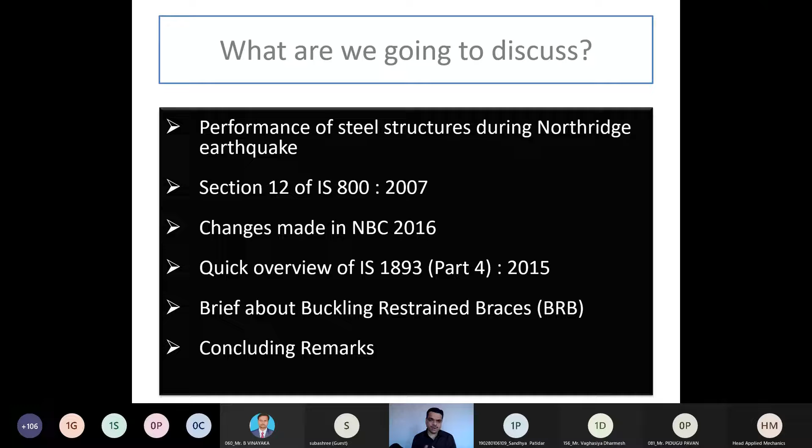Okay, let us begin our talk with the Northridge earthquake and steel structures. So this is the common statement: whenever we talk about steel structures, they are considered relatively safe for earthquake resistant design, because it's a more ductile material compared to RCC, reinforced cement concrete. That's why steel structures may be a good option as compared to RCC.

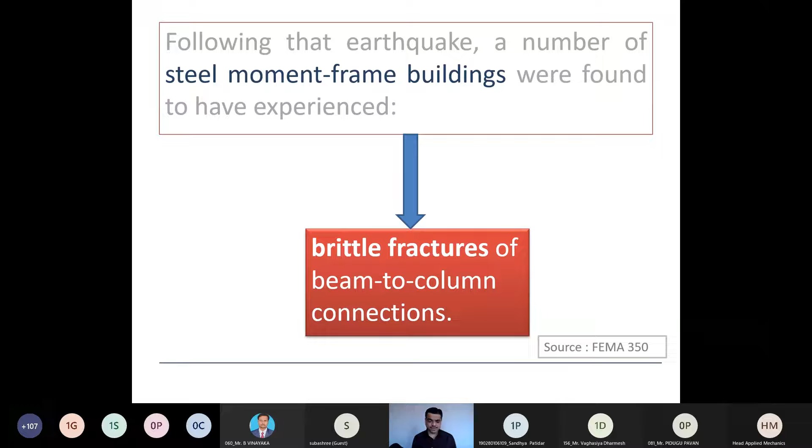But what happened in the Northridge earthquake, which occurred around 1994, challenged this thought process that steel structures are not vulnerable during extreme seismic events. Following that earthquake, a number of steel moment frame buildings were found to have experienced brittle fractures of beam to column connections. Just focus on this area: the failure mode was brittle fracture of the beam to column connections, and it was not just in one or two buildings—many buildings had this kind of failure.

If we quickly take the statistics of the damaged buildings by height and age, we can say it was ranging from 1 story to 26 stories. And age spanning, the buildings were as old as 30 years to structures being erected at the time of the earthquake itself. So it's quite a diversified range of structures which were damaged.

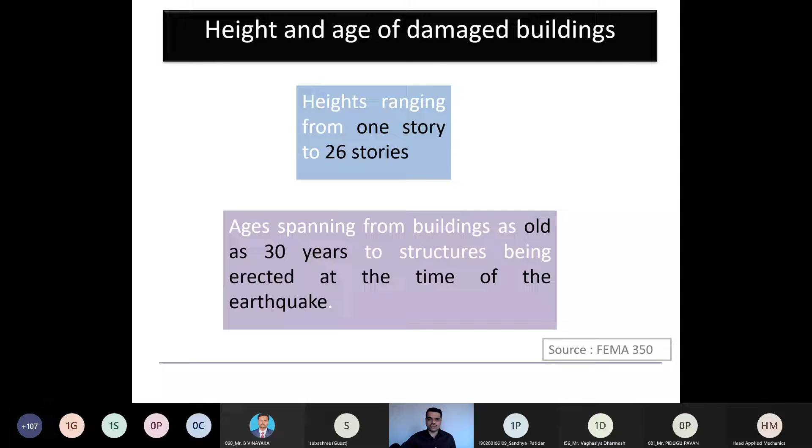Again, it's important that no steel building suffered a catastrophic failure that took lives in that earthquake, but some were so badly damaged they had to be demolished. If a building is completely damaged and required to be demolished, that's a huge financial loss. And if we talk about industrial structures in oil and gas, thermal power plants, etc., it's a huge loss in terms of revenue and property asset of the country.

So what happened in all the damaged buildings? There was one peculiar failure—weld connections cracked in the beams and columns of at least 90 such buildings.

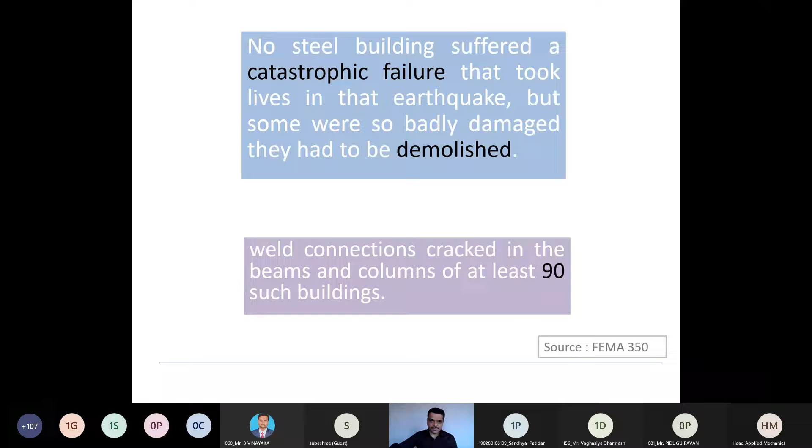Whenever we design for earthquake resistant design, the expected damage is always a kind of moderate yielding, maybe localized buckling of the steel elements. But the actual damage was brittle fracture at the beam column junction. And obviously, whenever the beam column junction fails, the structure doesn't have capacity to take more lateral load, maybe due to functional requirement, or it may not be fit for taking the next cycle of the earthquake. So these connections are required to be repaired. But this damage—the brittle fracture at the beam column junctions—was not at all expected.

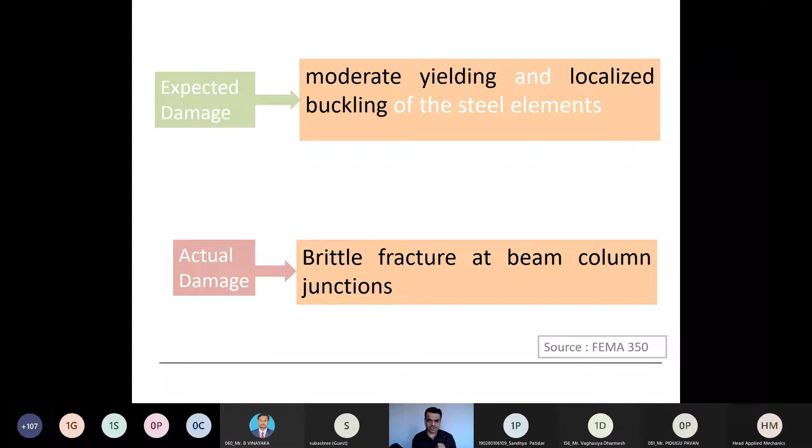So what is our overall design philosophy when designing for earthquake resistance? The structure should be able to withstand higher amounts of displacement, because we reduce the earthquake force by the response reduction factor and perform first order elastic analysis. But during an actual extreme seismic event, the force would be substantially higher, and the displacement the structure has to withstand will be much higher than what we get from first order elastic analysis. That's why the structure has to be ductile. If this joint is not able to withstand the higher displacement, the whole concept will not meet its requirement. So if inadequately constructed, these welded joints in moment frames can become weak links—this is the premature failure, because it's not expected.

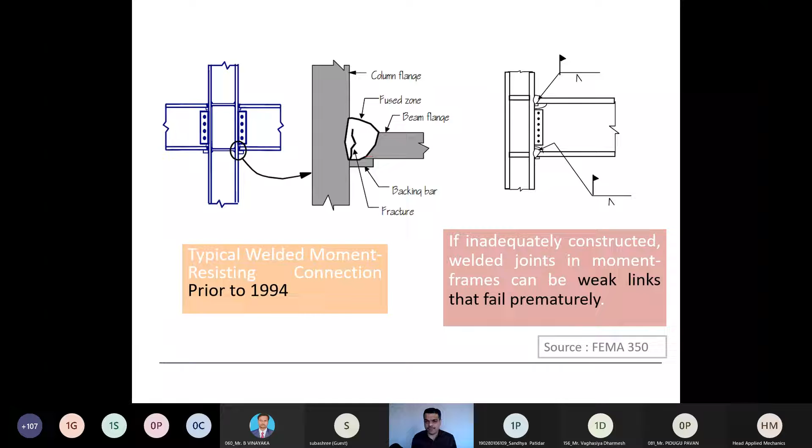Now let's say there is connection damage in a structure. In order to determine whether a building has sustained connection damage, it is necessary to remove all architectural finishes, fireproofing, etc. that has been applied, and then perform detailed inspections.

Let's talk about an industrial structure where an extreme seismic event has passed. Inspecting each and every connection is a very tedious exercise, and we do not have any set protocols for how to identify, just by visual inspection, whether a connection is adequate or not, unless it has some major distress which is visually appealing or visible.

Even if no damage is found, this is a costly process, and repairing a damaged connection is even more costly. And that's why after the event of the 1994 Northridge earthquake, the entire typical welded connection was revised significantly.

That was an immediate improvement. Thereafter, around 120 to 130 steel connections were tested full scale, and based on that, pre-qualified connections were developed. So if I get a certain beam size, the column size is fixed, or similarly if I have a certain column size, the beam size is fixed. Considering all permutations and combinations, 120 to 130 full scale connections were detailed out, and a detailed pre-qualified connections guideline was developed.

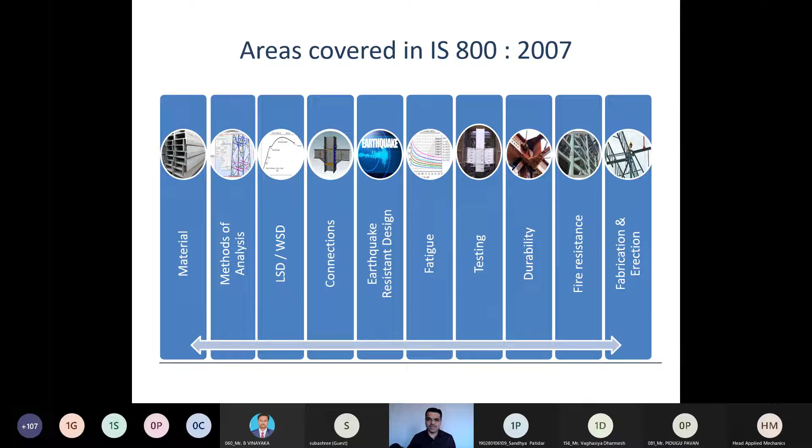So earthquake resistant design is just a small part of it, which is section number 12. Section 12 talks about earthquake resistant design.

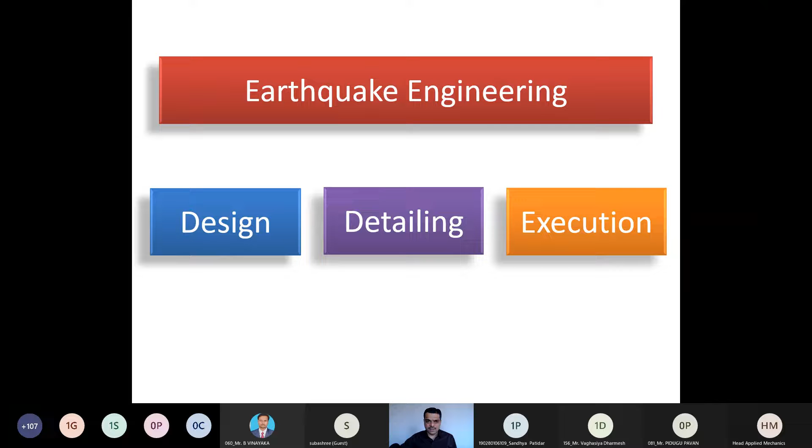Whenever we talk about earthquake engineering, these are the three main pillars of earthquake resistant design: design, detailing, and execution. All three pillars have to be given proper justice simultaneously. For example, if I have done very good design and detailing, but execution is not done as per the detailing, then it doesn't serve any purpose. Similarly, if design and execution is done but detailing is not up to the mark, like connection detail, then the entire aim of earthquake resistant design will not be met. So these are the three main verticals we should keep in mind when talking about earthquake resistant design.

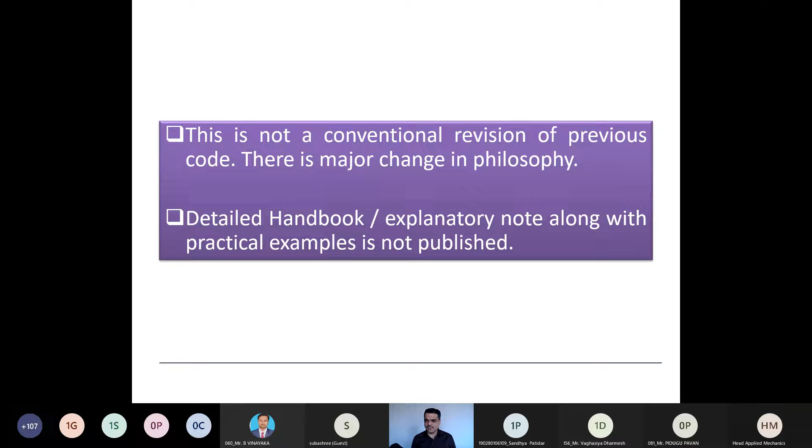As I told you, this is not a conventional revision of the previous code. There is a major change in philosophy in IS 800 2007, so there are many practical difficulties. Right now there is one online course going on related to IS 800 2007 wherein we are discussing and debating each and every clause. One of the major problems is that the detailed handbook explanatory note along with practical examples is still not published. That's why there are many questions in the minds of structural engineers.

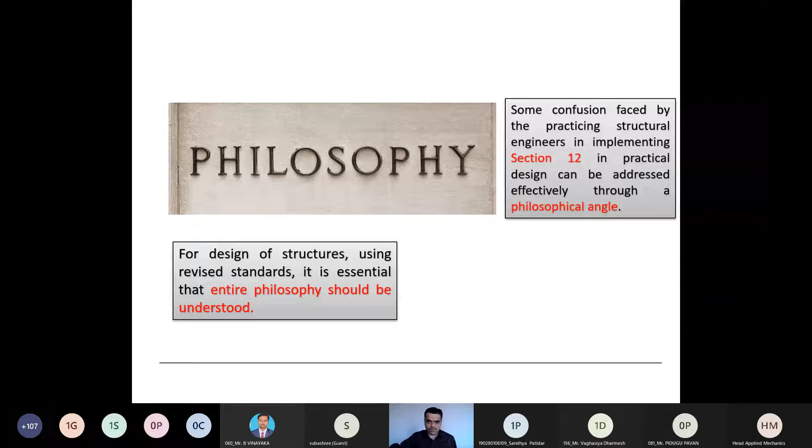But what I always say is that these confusions faced by engineers, for section 12 or other parts of the code, if we try to understand the entire philosophy of the code, then it is easy to understand and decode the individual clause and how we can apply it in software. So we will touch upon a couple of clauses to understand in such detail.

But of course we can have a more elaborated discussion, maybe if required in future. Right now, I'll touch upon a few important clauses of section 12 and share my quick perspective related to different clauses, and we'll talk about a couple of clauses in more detail.

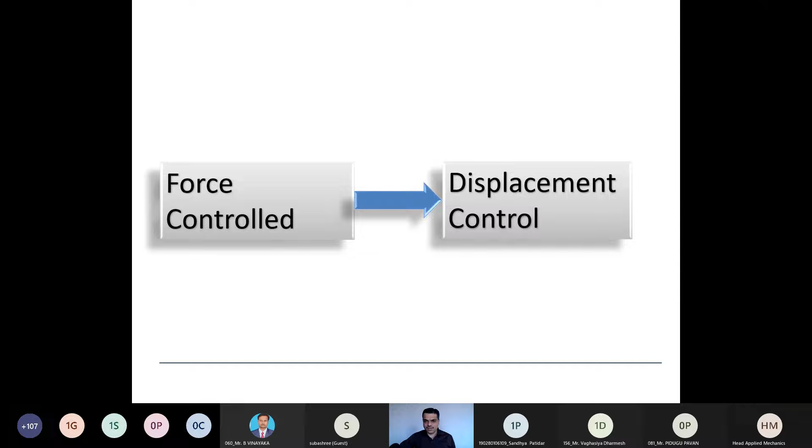So now we can say that we are migrating from force controlled design to displacement controlled design in our overall design philosophy of earthquake resistant design. Generally we are performing first order elastic design, and these are the two major drawbacks: as we all know, reserve strength cannot be quantified, and the collapse mechanism is not known whenever we perform only first order elastic analysis.

Now when you talk about section 12, it says that the steel frames shall be so designed and detailed as to give them adequate strength, stability, and ductility to resist severe earthquakes in all zones without collapse. So this is the overall aim of earthquake resistant design as per section 12.

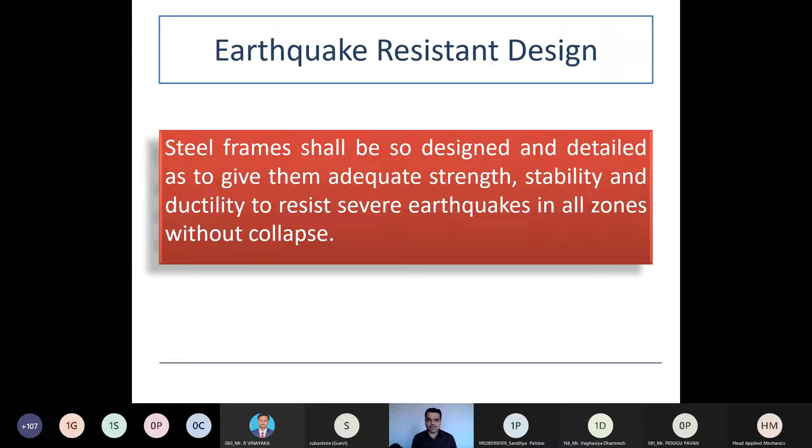So I always used to say that when we talk about section 12, it is nothing but ductile detailing for steel structures. Like for RCC, we have IS 13920, which is a separate code detailing out ductile detailing for reinforced concrete structures. But for steel structures, I'm used to saying that section 12 is ductile detailing for steel structures.

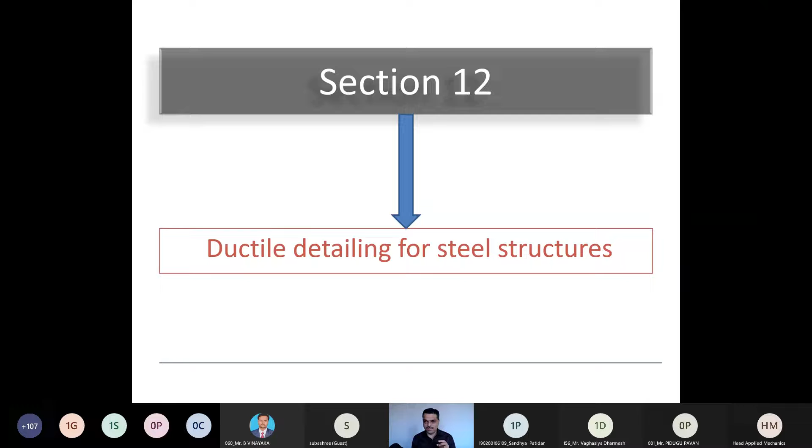So let's have a quick overview of section 12, and we will try to discuss a couple of clauses in detail.

So section 12 is for earthquake resistant design, and it is applicable to frames which resist earthquake load. Now in steel structures, not all frames are designed for resisting lateral loads, or rather for resisting earthquake loads in today's context. So this section is applicable only to frames which are going to resist, or which are designed to resist, the earthquake load.

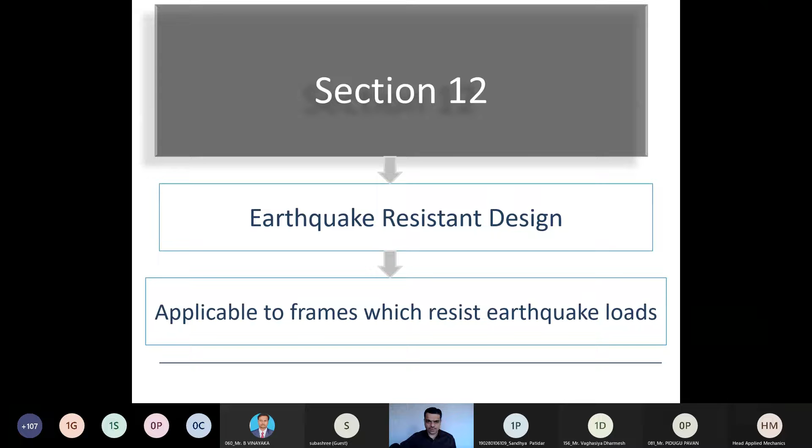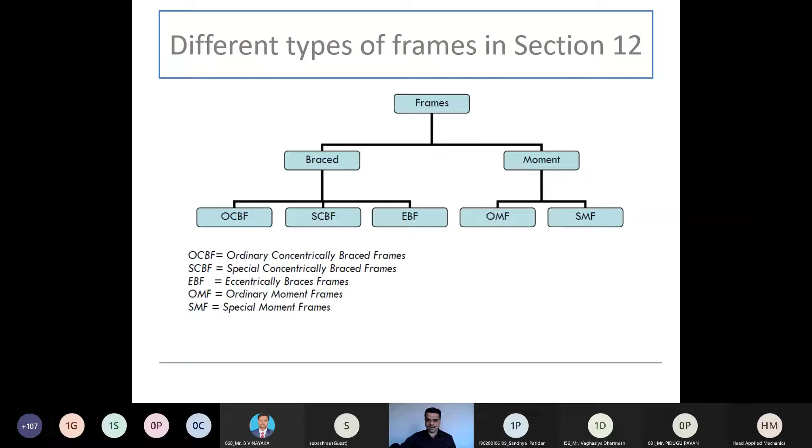So before that, just let me touch this one point.

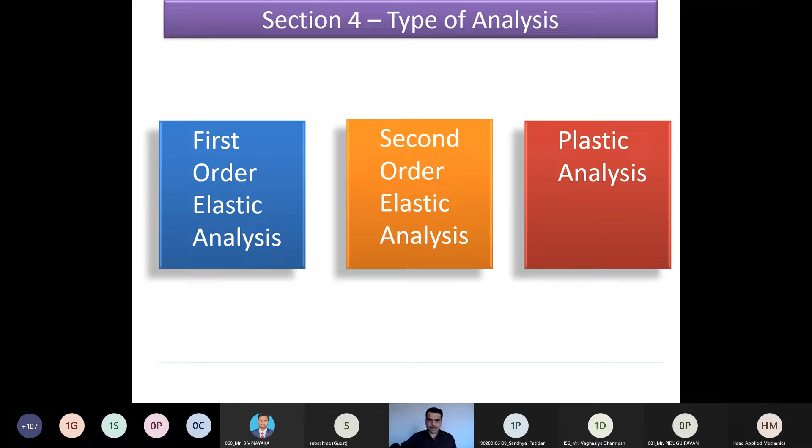Section 4 of IS 800-2007 talks about different types of analysis, wherein plastic analysis is also detailed out. Generally plastic analysis is allowed in IS 800 or BS 5950 code. It is allowing the use of plastic design where loading is predominantly static and fatigue is not a design criteria. So whenever we talk about earthquake resistant design, we can go for this plastic analysis. This plastic analysis is nothing but a kind of performance based design. It is already included in IS 800-2007 section 4, and this is a major area which should be further taken up in the industry for cost optimization as well as for ensuring better performance of steel structures during extreme seismic events.

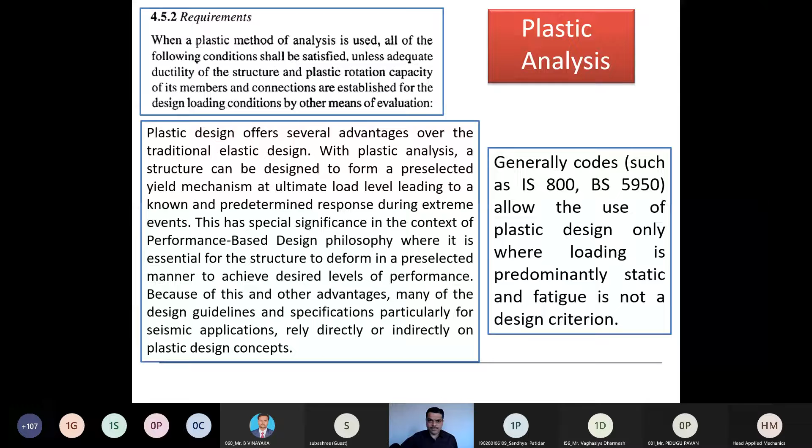So what will happen if you start considering plastic analysis? This is a simple diagram which I have put up here. As we all know, whenever we consider a simply supported beam and apply a concentrated load, up to the elastic limit we will have the moment My. And if we consider it as a fully plastified cross section, the plastic moment will be 15% higher as compared to the elastic limit.

So this is only one beam which we are talking about. But when we talk about a real structure, there will be more redundancy, which results in higher strength using plastic analysis. Depending on the degree of indeterminacy, a number of hinges are required to be produced before the yield mechanism can form, which results in a significant reserve strength beyond the elastic limit.

So at present it's not followed in the industry, but it is already written into the code. I am suggesting that we should prepare certain guidelines for practicing engineers so that it can be followed into the industry with more confidence.

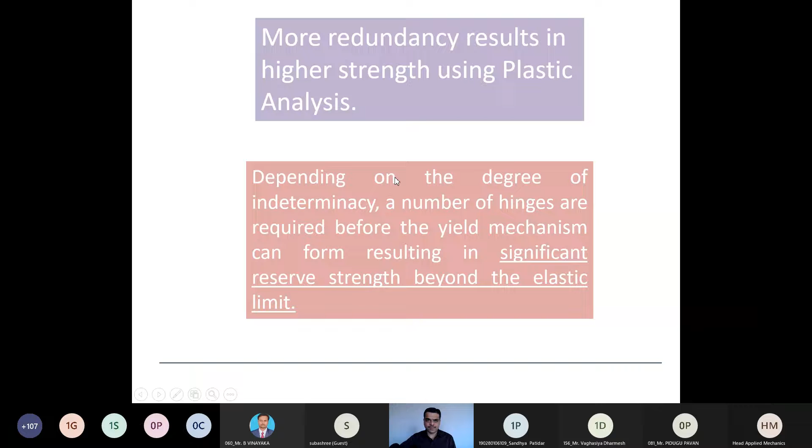Now, when we talk about section 12, as I told you this is a kind of ductile detailing, more thrust is given to connection design in section 12, and earthquake forces are generally increased by 20% for connection design. Detailing of connections is also suggested for different types of frames.

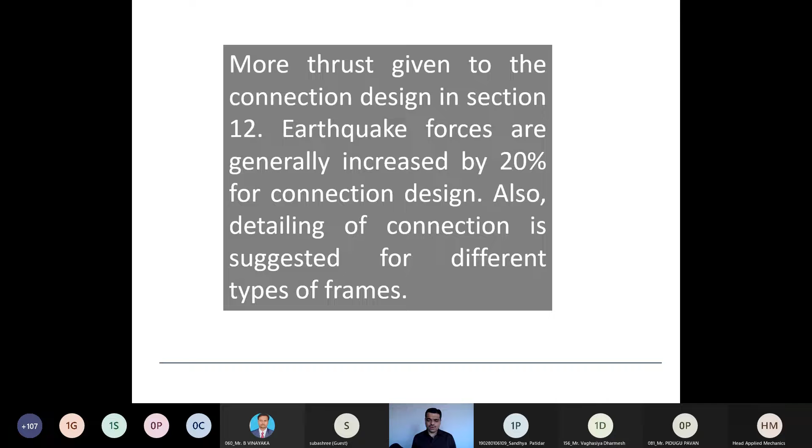Quickly, if we talk about connection details as per section 12, it talks about complete penetration butt welds, and high strength friction grip bolts or turned and fitted bolts to be used. The bolts are to be fully tensioned. Regarding weld, we have already discussed that all welds should be full penetration butt weld except splice. So no other type of weld is allowed.

So whenever we come to section 12 for earthquake resistant design, this is the major area for connection design we should take care of, because it changes the type of bolt as well as the type of weld.

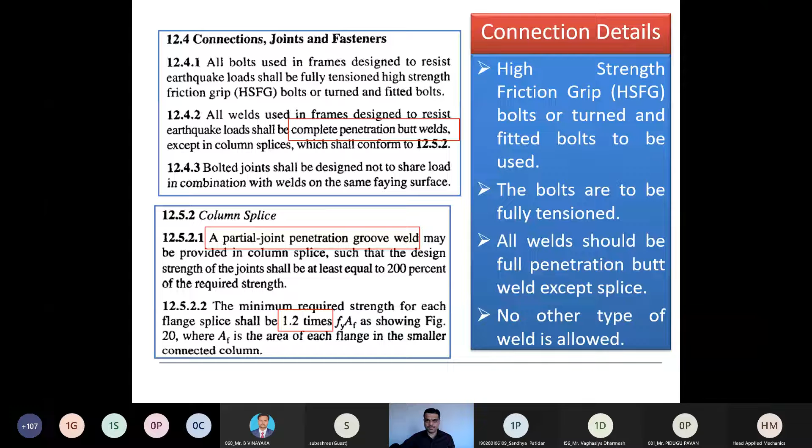Now this is a very interesting clause, para number 12.7. It is for ordinary concentrically braced frame. Let me tell you honestly, when I read this clause for the first time, I took at least a couple of years to understand it, because every time I'm designing a new structure, I come to this clause, I start to rethink on it, but it was not getting very clear in my thought process. But after designing a few structures after 2008, slowly and gradually I started thinking about this clause, and I'll share my own perspective, what I understand. Let me tell you honestly, this clause is simply, or let's say silently, ignored in practice as of today. Now let's try to read out what it says first.

What it says is that the ordinary concentrically braced frame, OCBF, should be shown to withstand inelastic deformation corresponding to a joint rotation of at least 0.02 radians without degradation in strength and stiffness below the full yield value. Ordinary concentrically braced frames meeting the requirements of this section shall be deemed to satisfy the required inelastic deformation.

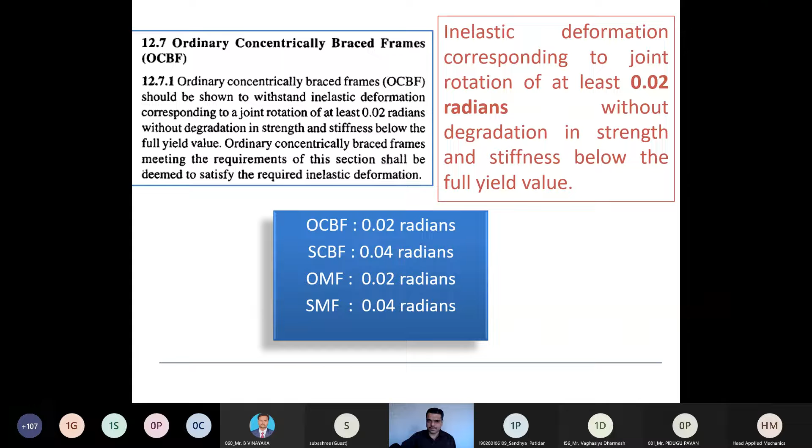So another requirement for ordinary concentrically braced frame: it is said very clearly that K bracings are not permitted, and slender bracings are not permitted. Now this para number 12.7.2 is also creating a lot of debate and discussion, because it restricts the bracing member to a slenderness ratio of 120 only. What's the reason for this 120?

One reason is that whenever we talk about earthquake force, it is actually reversing, let's say, in the plus x and minus x direction. So if we have provided bracing in the structure, that bracing member will have to take compression in a certain cycle, and then it has to take tension in the reversal cycle.

So when the compression force is applied on the bracing, and this force has exceeded—because as we just discussed, we are actually reducing the earthquake forces using the response reduction factor—now during an extreme seismic event, if our bracing buckles during the compression cycle, it won't be able to take the next reversal cycle coming through tension. Because of that, there is a higher requirement for the bracing with respect to slenderness.

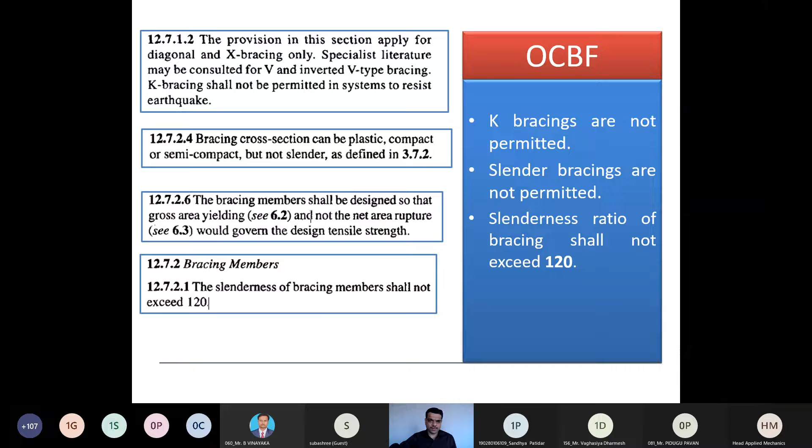Now, in OCBF, again, there are a few other requirements: the utilization ratio in compression should not exceed 0.8, and the criteria for design of tension member is also defined here. Connection design criteria are mentioned for the bracing as well.

Now let's go to SCBF, which is a specially concentrically braced frame. As we discussed, for the specially concentrically braced frame, the first thing is the joint rotation of 0.04 radians we need to demonstrate, and thereafter these other requirements are given. So for SCBF, the first requirement is that all sections shall be plastic, all braced cross sections.

And the slenderness of the bracing shall not exceed 160. This only applies to the bracing which are not taking part in the earthquake resistant design, or let's say these are just taking axial tension.

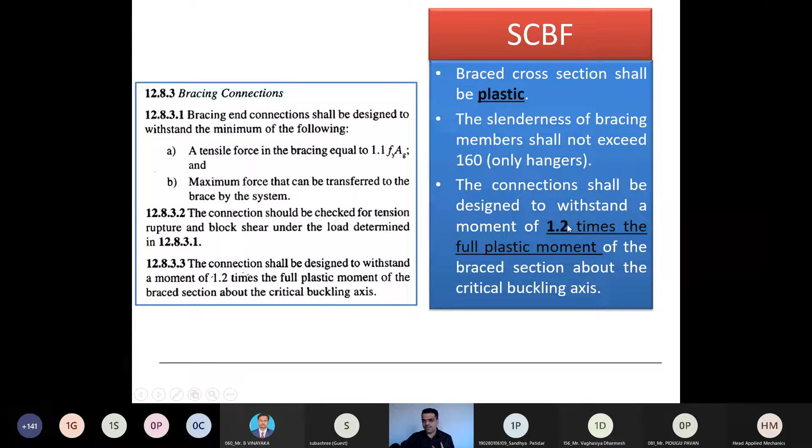And the connection shall be designed to withstand a moment of 1.2 times the full plastic moment. So the connection shall be designed considering this 1.2 times the full plastic moment, and accordingly that connection needs to be detailed out.

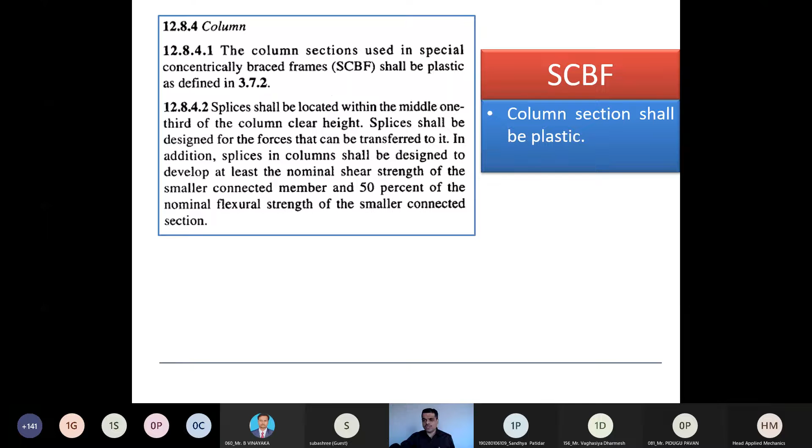And for SCBF, obviously all column sections also shall be plastic.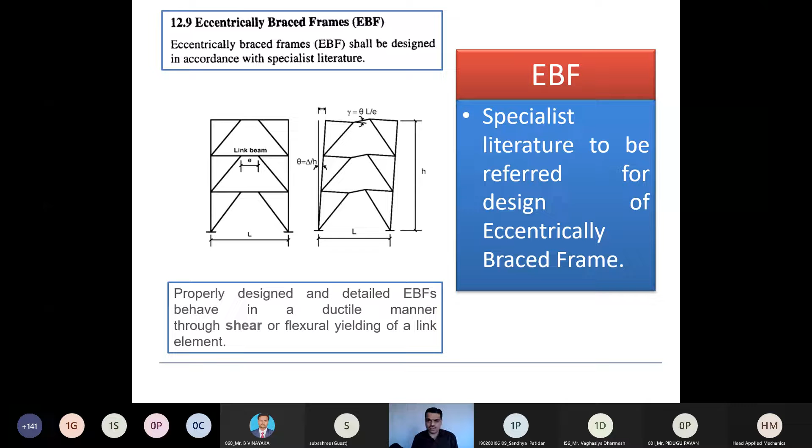But that thought process is not fully correct, because as you all know, whenever we talk about EBF, we actually need to create a kind of link beam between two connected bracings, and that link beam will absorb the entire seismic energy during the extreme seismic event, while the rest of the structural elements remain elastic. So this is the overall philosophy or concept of the EBF, which is not at all detailed out in our code. Instead, it is said that specialist literature should be referred.

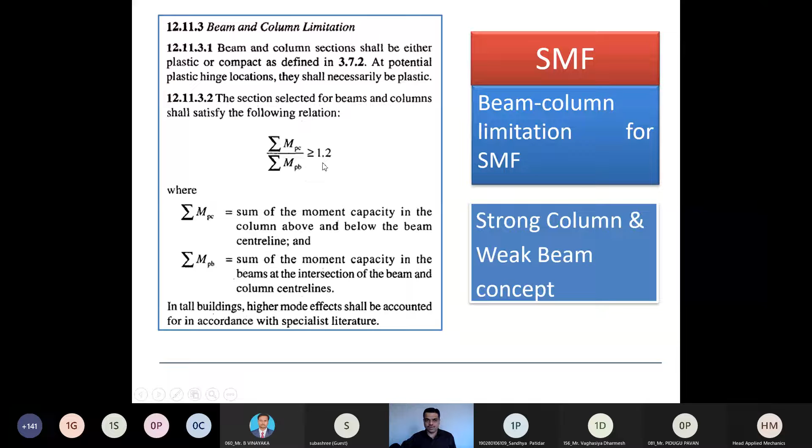Now, when IS 13920 was released, it introduced the clause for strong column and weak beam, and right now that ratio is 1.4. But when we talk about steel structures, the strong column weak beam concept was introduced long ago, in 2008, and that ratio is 1.2, which is detailed out in paragraph number 12.11.3.2.

And one more area related to the design of column bases, which is creating a practical problem, because it says that the fixed column bases and their anchor bolts should be designed to withstand a moment of 1.2 times the full plastic moment capacity of the column section. And the anchor bolts shall be designed to withstand the combined action of shear and tension, as well as prying action, if any.

Now, what happens if we really put the actual numbers, considering the full plastic capacity of the column section, is that the size of the base plate and the anchor bolt become extremely high or impractical to accommodate into that region. That's the common feedback which we are receiving regularly from practicing engineers, and we also experience the same thing while following this clause.

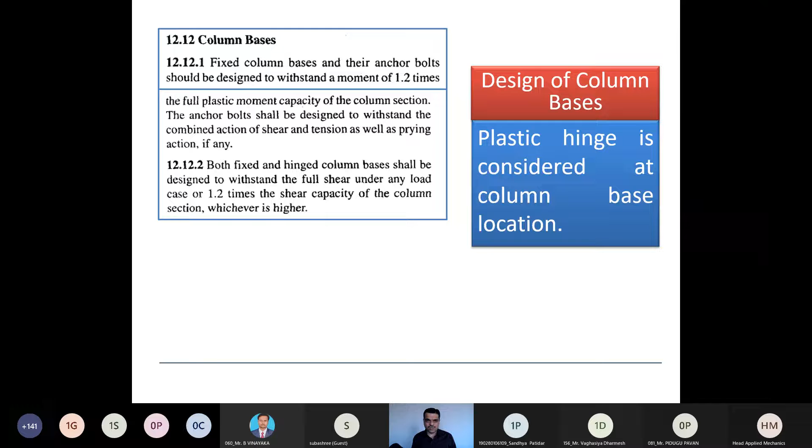But the overall intent of this clause is that the base plate connection is also one of the locations where a plastic hinge could occur, and that's why that junction also needs to be detailed out with this requirement. But I think some more clarification is required in this clause.

Okay, so this was a quick discussion related to section 12. Of course, we have not discussed each and every clause, but I just took up a few important clauses for discussion. Now here I have just made a quick comparison with the older Indian Standard code, which is the 1984 code.

And right now, let us talk about the design methodology. As we all know, 800-2007 is a limit state design method, and the old IS code is a working stress design method. So when we compare the member design, and if we consider IS code 1984 as a benchmark, then the member design may be economical as per 800-2007, or maybe similar in some cases. And it may be stringent in certain cases, because there are certain different limit states which have been introduced in 800-2007.

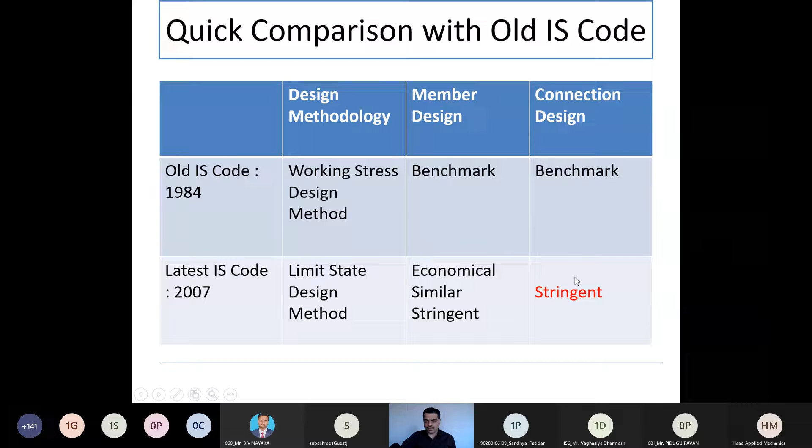But most importantly, when we talk about connection design, and if we make the benchmark the connection detailing as per 800-1984, then the connection design is substantially more stringent as per 800-2007. And that's what I'm suggesting to different groups of practicing engineers whenever I get an opportunity, because there are many offices in which the connection design is still not updated with respect to the latest code - it is still prevailing with respect to the earlier code. So I just wanted to make this point here, that the connection design is stringent as compared to the earlier code.

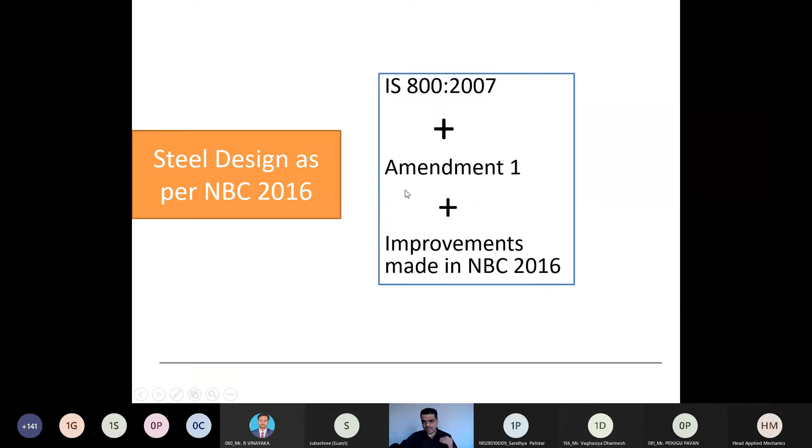Let's quickly touch upon changes in NBC 2016 with respect to design of steel structures. As we all know, IS 800/2007 was released in 2008, and thereafter only one amendment was released, which is amendment number 1, released in 2012. This is the final document we have as of today, but there is a major update to this. When NBC was revised in 2016, majority of the Indian standard codes were reproduced. So when IS 800/2007 was reproduced in NBC 2016, it included IS 800/2007 plus amendment number 1 plus improvements made in NBC 2016. So NBC 2016 actually becomes the latest document for design of steel structures as of today, having IS 800/2007 plus amendment number 1 included, plus certain improvements made in NBC 2016.

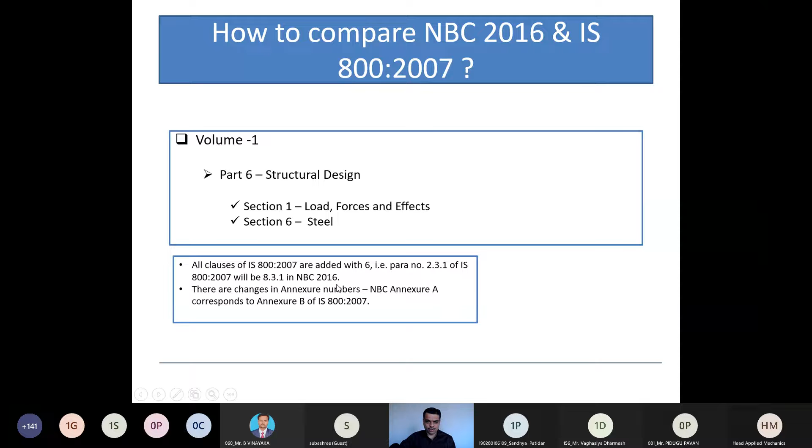Here I'll give you a quick methodology on how to read and compare NBC 2016 and IS 800/2007. In NBC there is a volume 1, then part 6 which is structural design, and then section number 6 which is for steel design. So for example, if you have paragraph number 2.3.1 of IS 800/2007, the same will be mentioned as paragraph number 8.3.1 in NBC 2016.

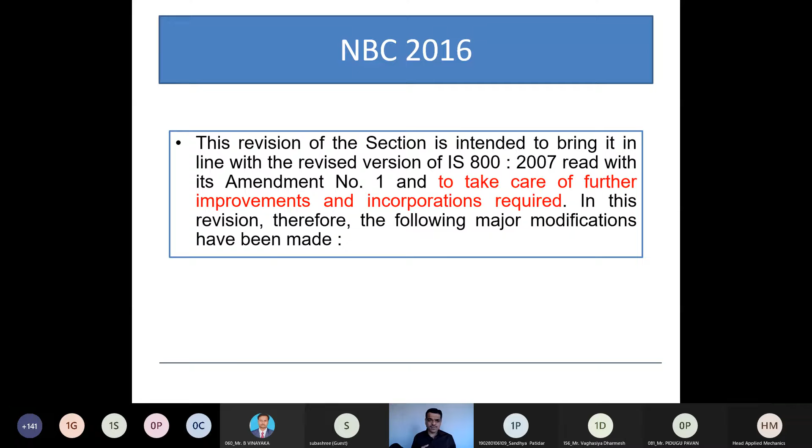I have taken this extract directly from the foreword of NBC 2016 for your quick reference: this revision of the section is intended to bring it in line with the revised version of IS 800/2007 read with its amendment number 1, and to take care of further improvements and incorporations required. In this revision, therefore, the following major modifications have been made. Here I've taken a couple of extracts from the foreword related to today's talk.

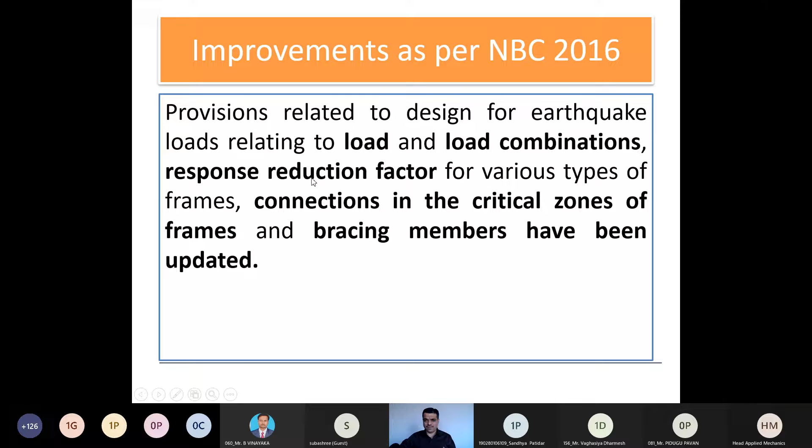It says the provisions related to design for earthquake loads relating to load and load combinations, response reduction factor for various types of frames, connections in the critical zones of the frames, and bracing members have been updated. So whenever you're referring to section 12, please refer to the latest document in NBC 2016. Whatever we discussed related to section 12 was extracted from IS 800/2007. I'd advise, if you are referring to 800/2007, please keep NBC 2016 side by side, as this is the latest document, and you can see these differences have been made. Right now, due to time constraint, I'm not going into all the changes made, but you can go through NBC 2016, and if you have any further doubt, you can always contact me.

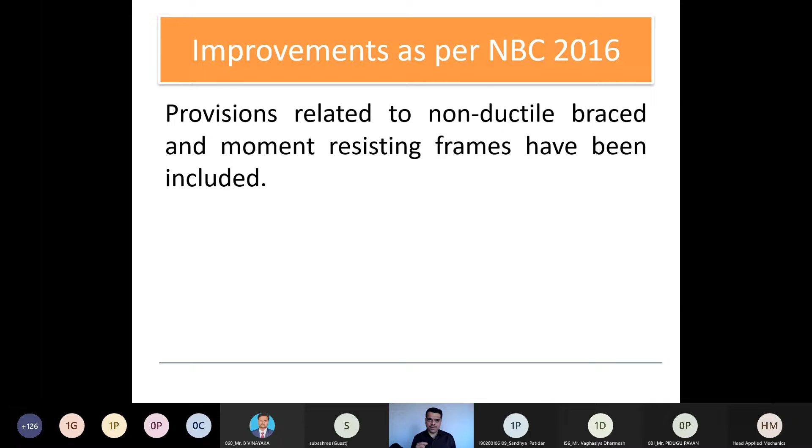Also, the provisions related to non-ductile braced and moment resisting frames have been included. This statement is taken from the foreword. And one more thing - provisions on ductile designing with respect to the column base connections have been updated. It is written that the column base connection design has been updated, but when I compared text to text of both documents, I couldn't find any difference. But you can go through it, and if you find any significant difference, you can highlight it and share it with me. So this was a quick discussion related to section 12 and the changes done in NBC.

Now when we talk about design of steel structures, IS 1893 Part 4 2015 is one of the most important codes, because as I told you, majority of the steel structures constructed in India are for industrial purposes, and that's where IS 1893 Part 4 2015 comes into the picture. Keep a note that for 1893 Part 4 2015, also 2 amendments have been issued. Those amendments I have not included in this presentation, so while referring to this presentation, please keep in mind there are additional 2 amendments which you should keep for reference while reading this document.

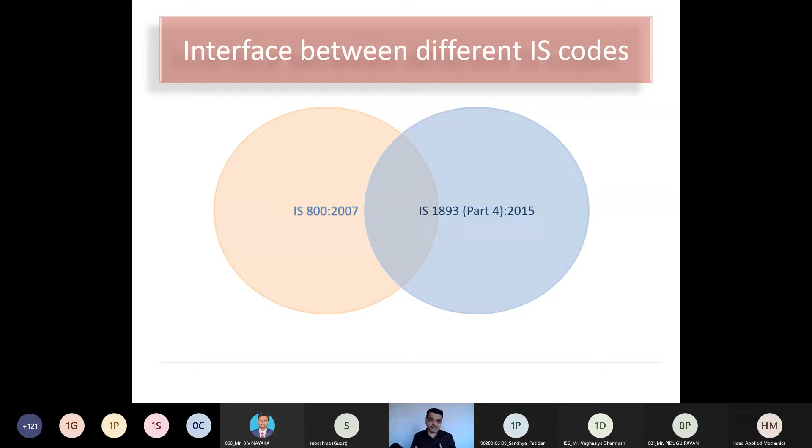So within that time, whenever the next revision comes, we get substantially higher amount of information, because whatever the global industry or the global accumulated intelligence has attained in the last 10 to 15 years is being incorporated into the code wherever possible. That's why we get a very steep jump whenever a revision comes, and that's why this interface is also very much important.

So for IS 1893 Part 4 2015, I have taken a few slides to quickly understand how it is different and what different methodology we need to adopt when designing industrial steel structures as per this code. First it talks about vertical acceleration: earthquake generated vertical inertia forces are to be considered in design unless checked and proven to be not significant. So to check and prove that the vertical inertia force is not significant, we will have to apply the vertical seismic load.

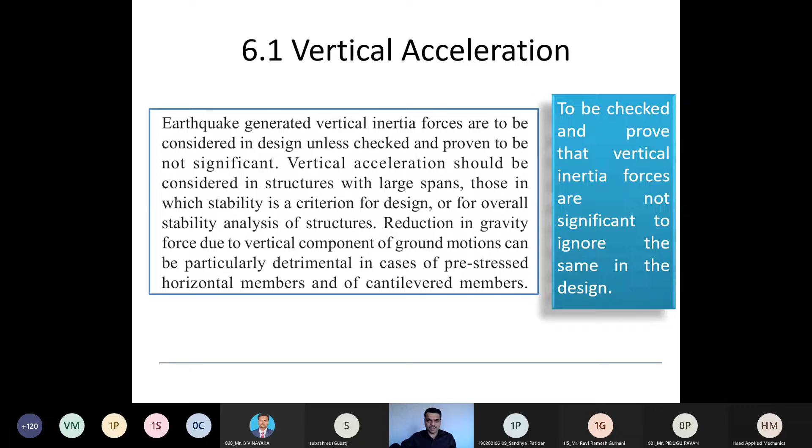It also says that in steel structures, members and their connections should be so proportioned that high ductility is obtained as specified in IS 800, avoiding premature failure due to elastic or inelastic buckling of any type. So when it says high ductility, the go-to statement is Section 12.

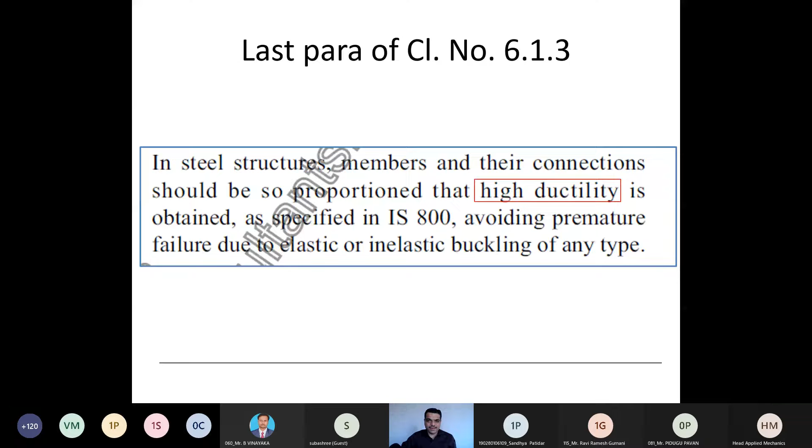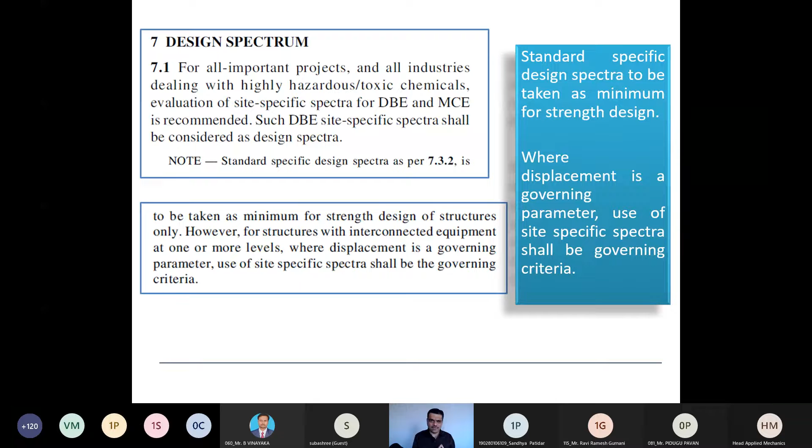Now it's talking about design spectrum. For the majority of industrial structures, we are developing the design spectrum also, which is a kind of site-specific spectra. The design is then performed as per the site-specific spectra as well as per the design spectra given in the Indian Standard Code, and accordingly the design is performed.

Now when we talk about load combinations, IS 1893 Part 4 2015 gives load combinations for the plastic design. We touched upon the plastic analysis area when we discussed IS 800 2007 Section 4. Para 8.3.1 of Part 4 gives the load combinations for plastic design, and that factor is 1.7, as you can see.

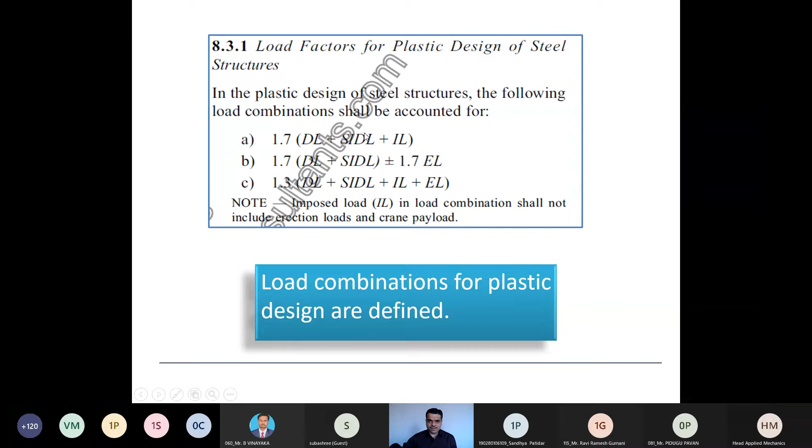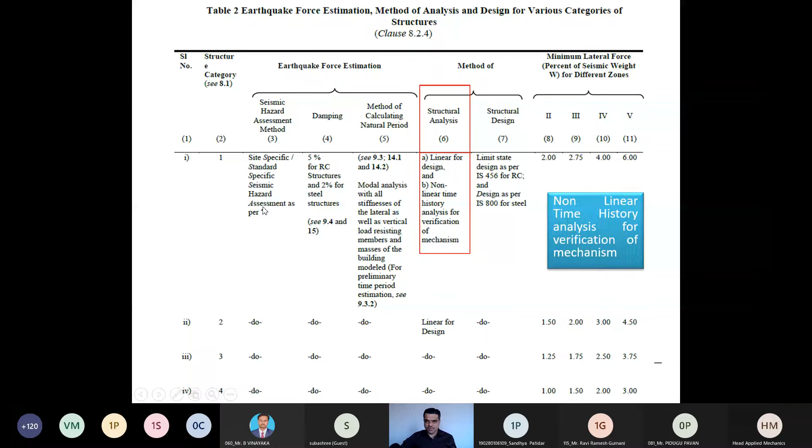It also says that whenever the plan-wise distribution of mass and stiffness is not symmetrical, we need to combine the earthquake forces in all three directions. Generally for industrial steel structures, the distribution of mass and stiffness will not be symmetrical, so consideration of earthquake force in all three directions simultaneously needs to be done.

Now one more clause creating problems in the industry is for soil structure interaction. It says soil structure interaction may not be considered in seismic analysis for a structure supported on rock or hard soil-like material, when N is greater than 50 and shear velocity is around 760 meters per second. So if my structure is sitting on hard strata, soil structure interaction may not be required. But for all other cases, whenever it is sitting on soft or medium soil, soil structure interaction is required - so for the majority of cases, it is required.

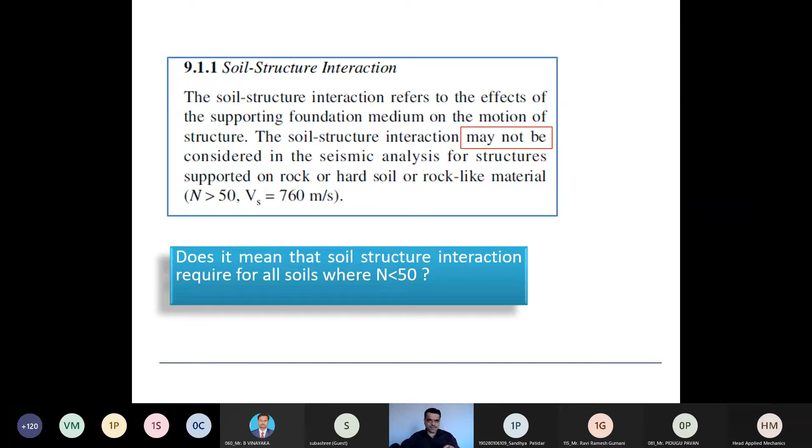Now, how to do it? There is always a debate happening between the design consultant, the proof checking consultant, and the owner's consultant. This area we can discuss in detail if you are interested, but right now I'm just highlighting a few of the important points as per this code.

Now it's talking about interaction effects between the structure and equipment - that is, the interaction effect between the structural primary system and the equipment secondary system. A very detailed process is given in the code for how this interaction effect can be considered. This is also one of the areas where difficulties are being faced, because there are no worked out examples.

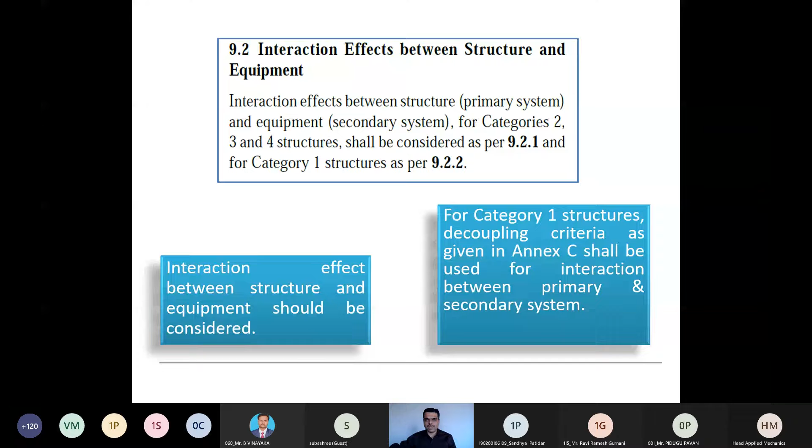One more area related to time period estimation. IS 1893 Part 4 says that the formula given in IS 1893 Part 1 for estimation of time period for buildings, which is para 7.6, is not applicable for industrial structures because they are highly irregular and there may not be an empirical formula like the one derived for building kind of structures in Part 1.

So the time period from the computer model will be considered, and that's why I've put this note in red that the time period calculation should be accurate. There are several instances in real projects where, because of a higher time period, the earthquake force is substantially lower. So based on our database and engineering judgment, we provide an internal scaling factor to enhance the earthquake force.

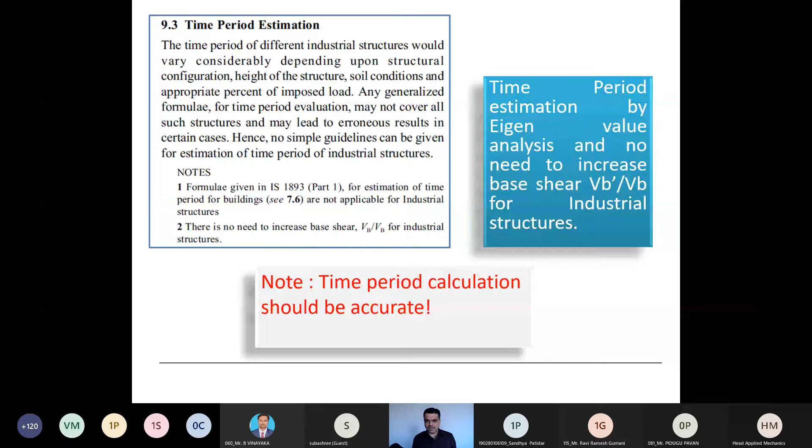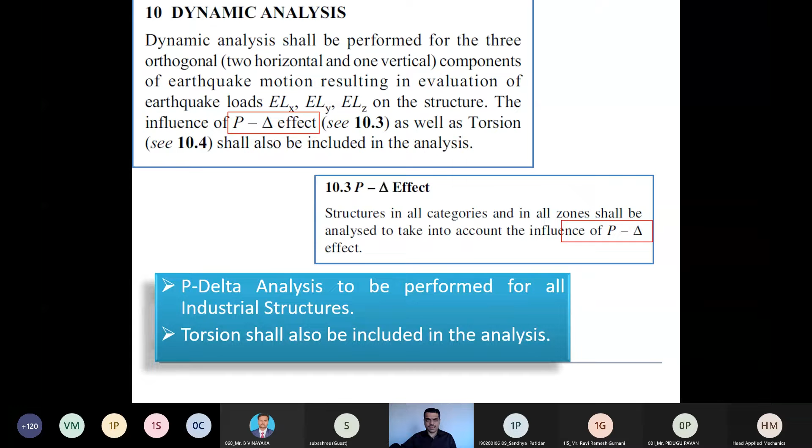Now the code says that the P-delta effect is mandatory for all structures, and torsion also needs to be included in the analysis. So second order elastic analysis is now compulsory for all structures.

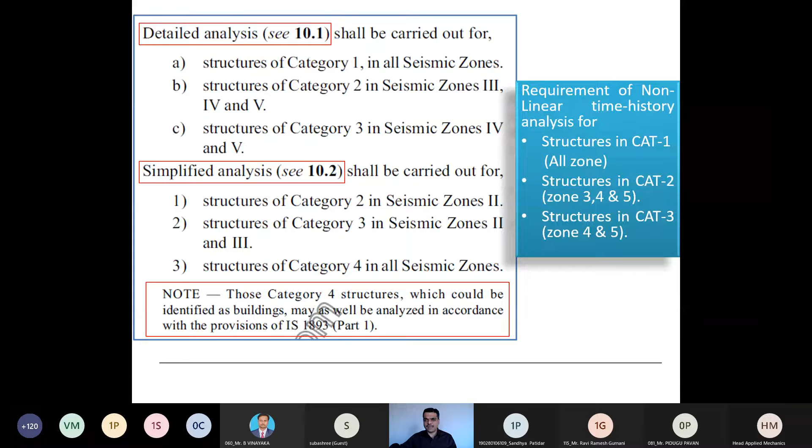This para talks about the requirement of nonlinear time history analysis for different categories of structures. Para 10.1.1 says that nonlinear time history analysis of structures subjected to seismic loads shall be performed for study of safety against collapse, and this is the only small para given. So this is also an area which needs to be detailed out to avoid ambiguity in practice.

Based on this, the collapse mechanism needs to be found out, and there are certain exercises going on in different organizations I'm connected with, regarding what is the actual impact on tonnage if we consider this clause versus if we ignore this clause.

One more important point - in Part 1 it is said that damping is 5% irrespective of any material of construction, whereas in this code damping is still 2% for steel structures. We can see in this first table it is 2%, and for the MCE case it allows a higher damping ratio. But when the damping is 2% for DBE, the multiplication factor for obtaining values of zone factor is 1.4.

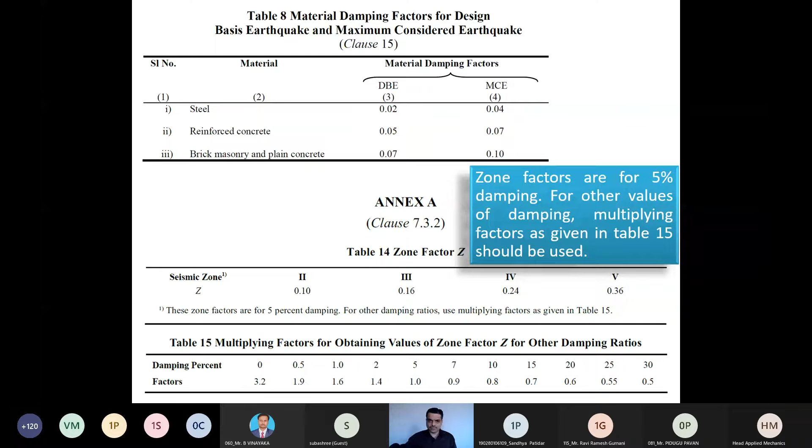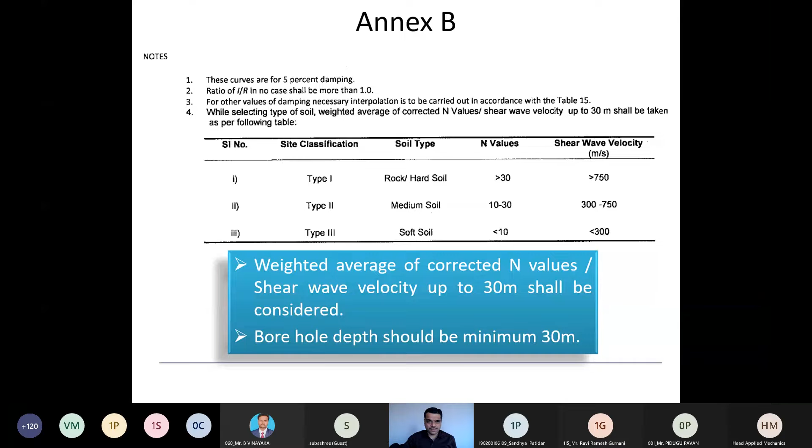So this was a quick discussion related to Part 4, 2015. Now let me take a few minutes for buckling restrained braces.

If we take a quick review of the existing structural systems for structures, we can divide them into two categories: conventional braced systems and moment resisting frames. Both systems have limitations - if I provide only a moment resisting frame, the structure becomes too flexible and doesn't meet the stringent drift functional requirement. On the other side, if I provide a braced bay...

...what happens is the capacity of the steel member in tension is significantly higher than in compression. So whenever the reversal cycle happens, the size of the bracing needs to be increased. Now the moment I increase the size of the bracing, the stiffness of the structure increases, and because of that the time period comes down, resulting in a higher seismic force. With the higher seismic force, the force in that bracing increases further. So it's a repetitive cycle, and at the end we tend to have a very bulky bracing.

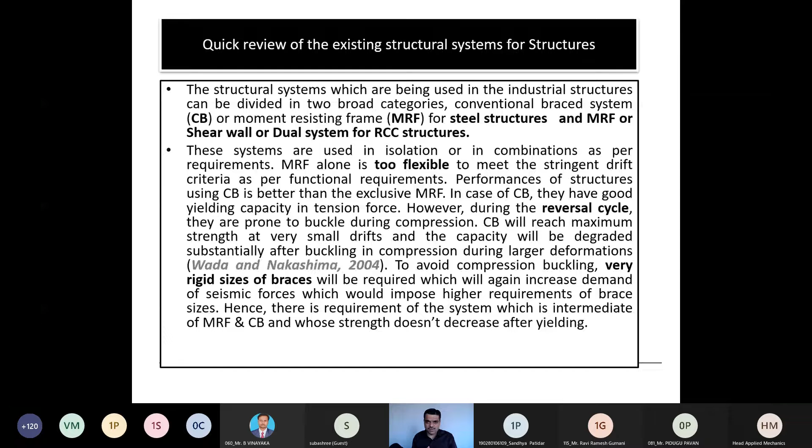So after designing so many structures, I kept thinking that there has to be an intermediate structural system between, let's say, MRF and conventional bracing.

And that's what these thoughts were generating repeatedly in my mind while designing the complex structures in oil and gas, thermal power plants, etc.

While attending one of the workshops of Japan's Society of Seismic Isolation, I came across the concept of buckling restrained braces. In simple words, it is a kind of brace which is designed to have similar capacity in tension and compression. This is the simple concept.

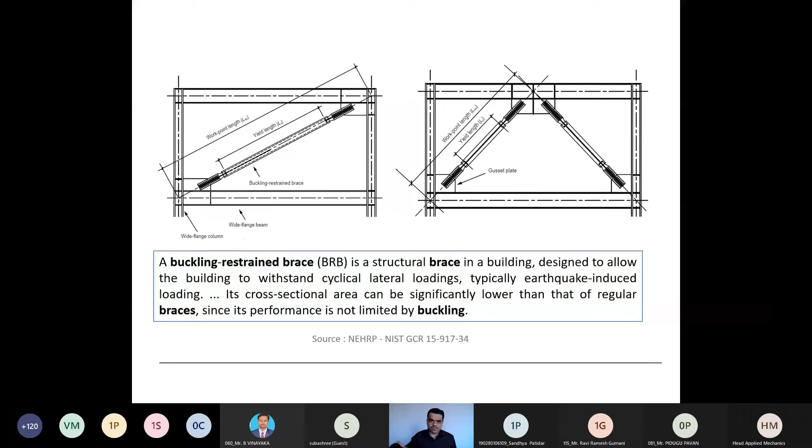If we talk about the history of BRB, when I was reading the history, actually the invention was started by an Indian and a Japanese engineer way back, I think in the 1970s. Thereafter, the Japanese people took it forward into research and development work, but then no further work happened in India. But if we see the roots, it is in our country. And of course, there is also one BRB which was developed in Bangalore.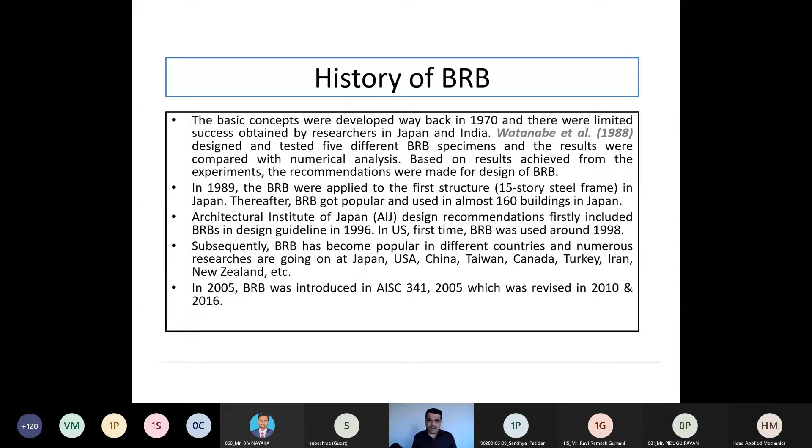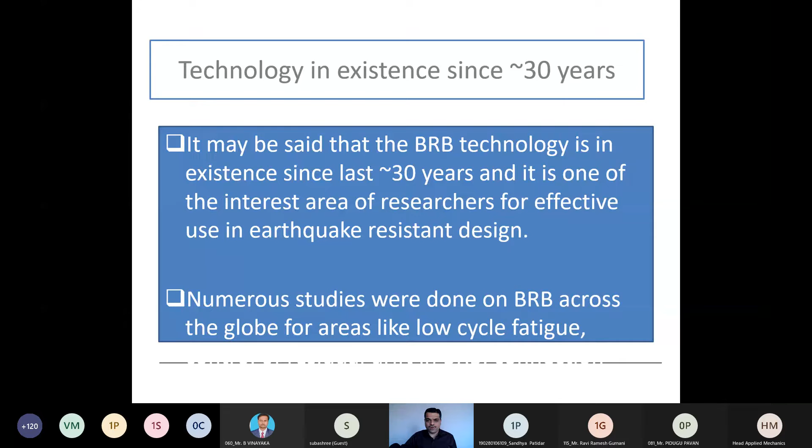We can say that this technology has been in existence for the last 30 years, and numerous studies are still being done on BRB across the globe for areas like low cycle fatigue, etc. So we'll not go into the detail of BRB here, but if you are interested, we can have a detailed discussion on this.

Right now, let me show you the different components of a BRB. It has a steel core, which resists the axial compression and tension cycle. To prevent buckling of this steel core during compression, we have a concrete fill, and this concrete fill is supported by the exterior steel tube.

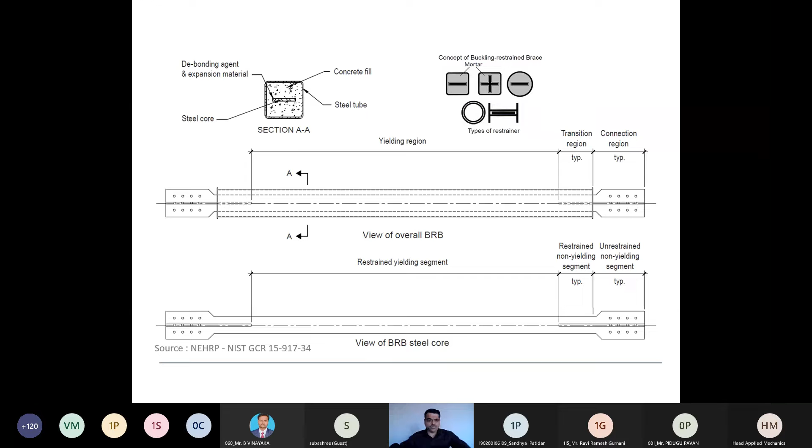The most important part is that there is a debonding gap between this steel core and the high strength concrete fill, or let's say the high strength mortar. The overall concept is to achieve compressive strength equal to tension strength, so that the size of the bracing is reduced, the structure becomes more flexible, and because of that there is lesser seismic force on the structure. So it is very much efficient compared to the conventional system.

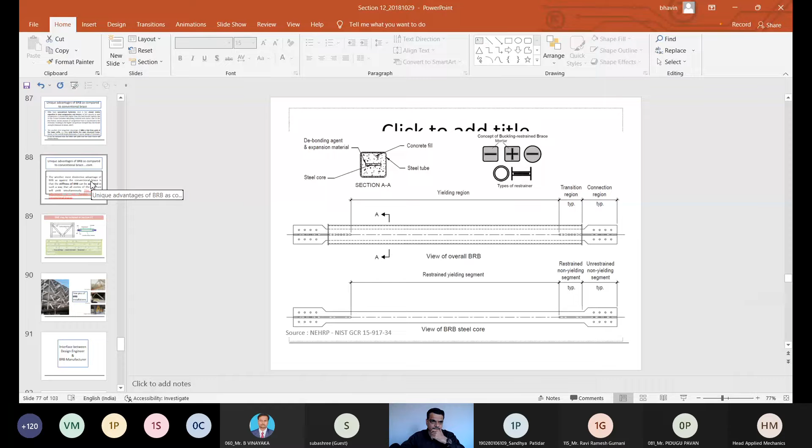If we talk about the unique advantages of BRB, it has symmetrical hysteresis, since it has almost similar capacities in axial compression and tension. In fact, its compressive capacity is a little higher, by let's say 10%, compared to the axial tensile capacity, due to low friction between the debonding material and the mortar.

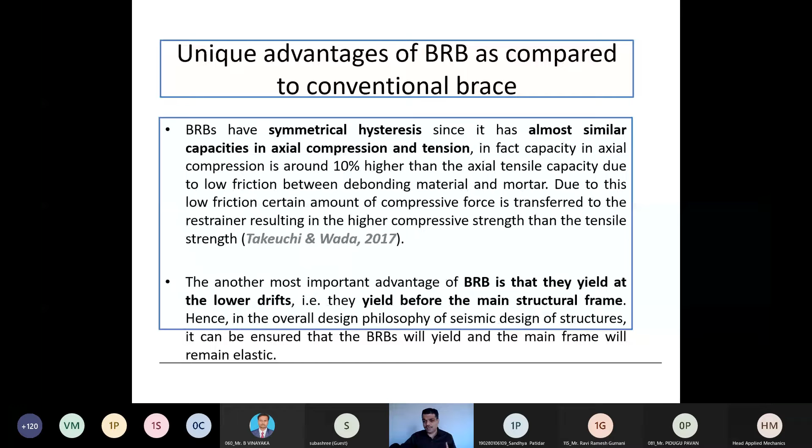Another important advantage of BRB is that it yields at lower drifts, so it will yield before the main structural frame, and can act as a fuse in the structure. One of the most distinctive advantages over conventional braces is that the stiffness of BRB can be adjusted so that all stories of the structure yield simultaneously. This kind of adjustment is not feasible in conventional braces.

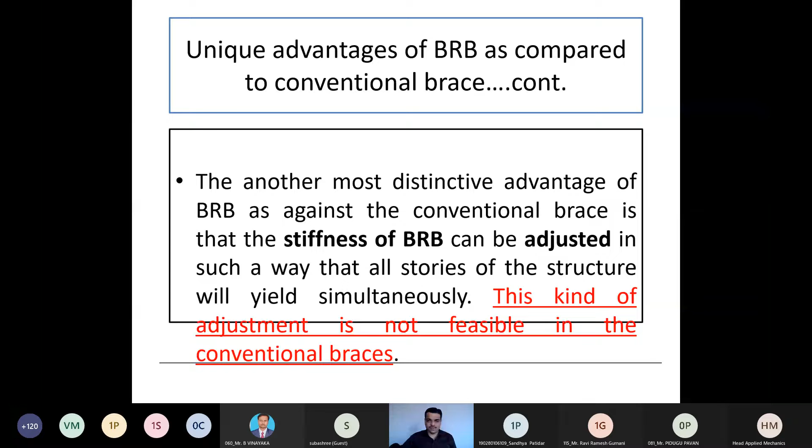So this is where I'm working right now, that this BRB may be included in Section 12. Right now it is not mentioned in Section 12 as an earthquake resistant design system. A design method that is becoming increasingly popular in Japan keeps columns and beams of buildings in elastic regions as much as possible by using buckling restrained braces as hysteretic dampers.

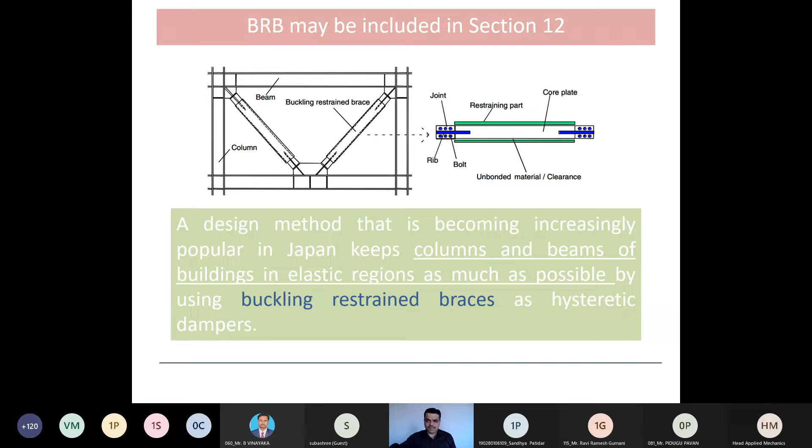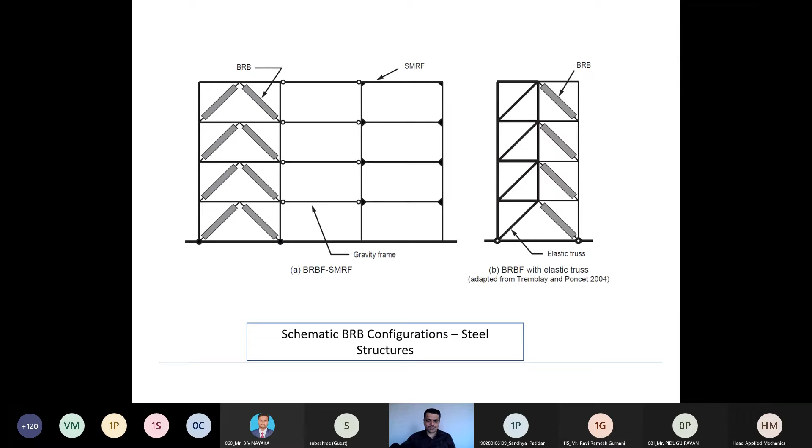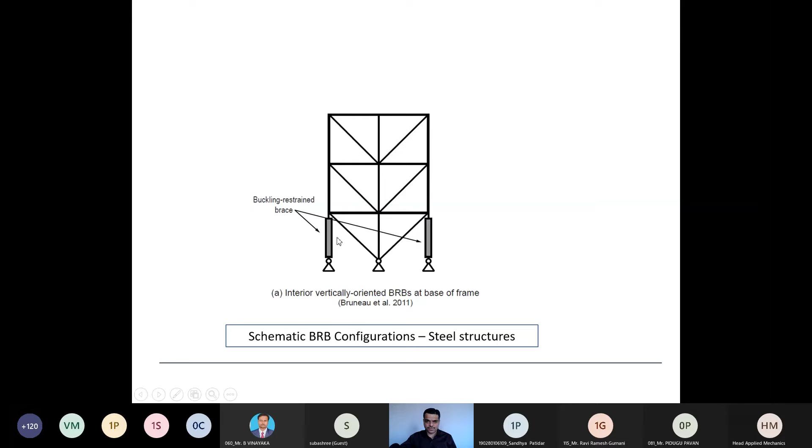These are a couple of examples of how BRBs can be placed into structures. Even BRB can also be placed as a buckling restraint brace as a column. This can also be used for retrofitting of existing structures, as well as it can be provided for new structures.

So with this, let me put a few points before we open the session for question and answer. Again, I would like to stress this point, which is connection design: connection design and detailing is vital for the earthquake resistant design of steel structures. And connection design should be in the scope of the structural engineer, and not in the scope of the agency preparing fabrication drawings. This is the general trend occurring in the industry, which I have observed in projects.

And whenever it was feasible, I curtailed it. I tried to change the practice. But what is happening?

See, the structural engineer is preparing the general arrangement drawings, considering the structural analysis, and then he will optimize the different cross sections, which is beam, column, bracing, secondary beams, etc. being provided. Now this entire lot will be transferred to the fabrication drawing preparing agency. Now it is in the scope of the fabrication drawing preparation agency to detail out the connections, and then to see whether there is any clashing or not, and then those documents will be again sent back to the main consultant for the review.

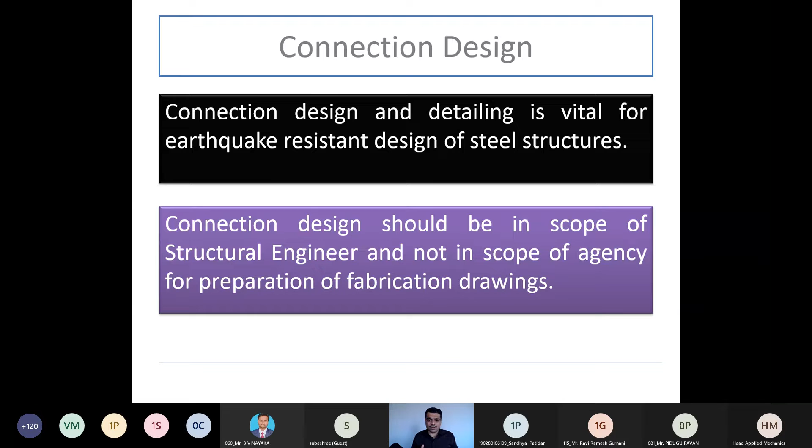Second point is the quality of welding. Now, quality of welding is very crucial for earthquake resistant design. And that's why it is suggested that shop welding should be preferred as against site weld. Now, whenever site welding is done, first of all, we do not have properly qualified welders. That is the first area.

Secondly, that welding is not checked properly on the site. So the required simple quality checks for the welding are not performed at the site, because if the welding is done at a height of 30-40 meters, the supervising engineer will go at 40 meters, and how much time he will be there. That's the one thing, that's for the supervision.

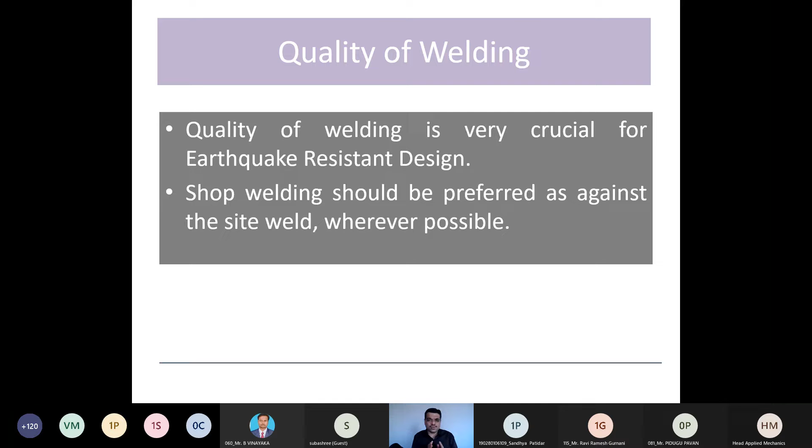And again, the quality checks which are required, kind of NDT tests for the welding, those are also generally not performed on the site. And that's why shop welding is always preferred, and that's where the connection detailing comes into picture. So as a practicing engineer, from the beginning we should conceive majority of the shop welding, and only a minority of site weld may be allowed in the less critical structural parts.

And let me tell you openly that these software are not fully compliant with respect to the Indian standard codes. Now, the reason may be the clauses may be ambiguous, or certain methodology or certain algorithm may not be available in the software. But sometimes it's not explicitly written in the manual of the software that such and such clause is not considered. So generally it is left to the design engineer, or the practicing engineer, that you should validate and authenticate the software.

So this was one of my roles in different organizations, and still today I'm doing it out of my passion and interest - that we are trying to compare the software along with the Indian standard code clause by clause. And then we try to see whether a particular clause is appropriately included or not. And with this, we have our in-house list of the clauses which are not included.

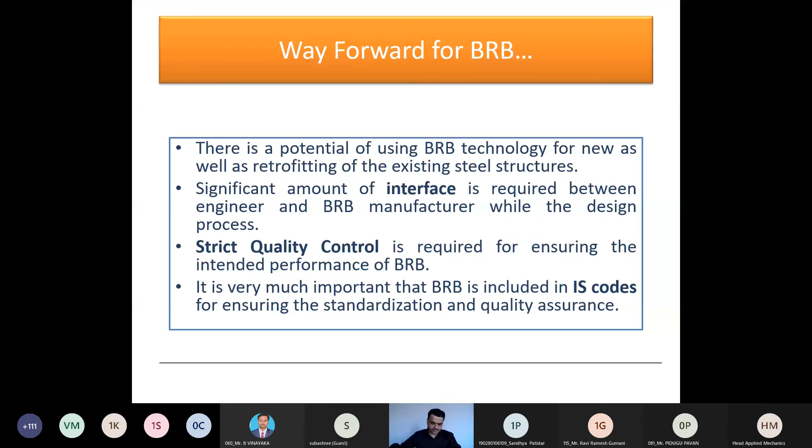That's all from my side, and now it's over to you. If you have any questions, doubts, or queries, please feel free to share. We will discuss it.

Thank you so much, sir, for making this morning session more interactive and more beneficial for all of us. You made our concepts more clear by touching peculiar topics like performance of steel structure during Northridge earthquake, buckling restraint braces. You also made us aware by introducing Section 12 of IS 800-2007, changes made in NBC 2016, and an overview of IS 1893 Part 4, 2015 in an understandable way. Thank you so much, sir.